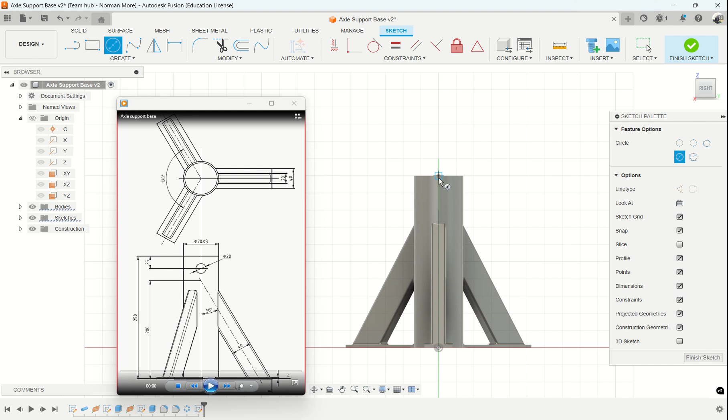So go to sketch, draw a hole in the center, 20 mils, and then dimension it from the top, 25 mils.

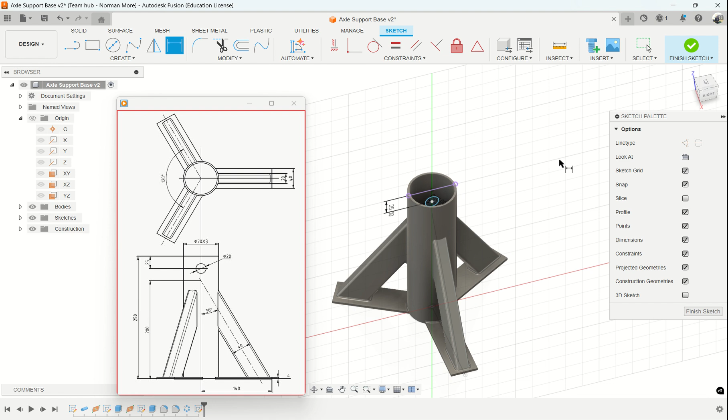And this hole is now, the sketch is in the middle. So I do my extrude. I pick the sketch, do an extrude cut, make it symmetrical so it passes both sides, and then do all and press OK. So that one is now finished.

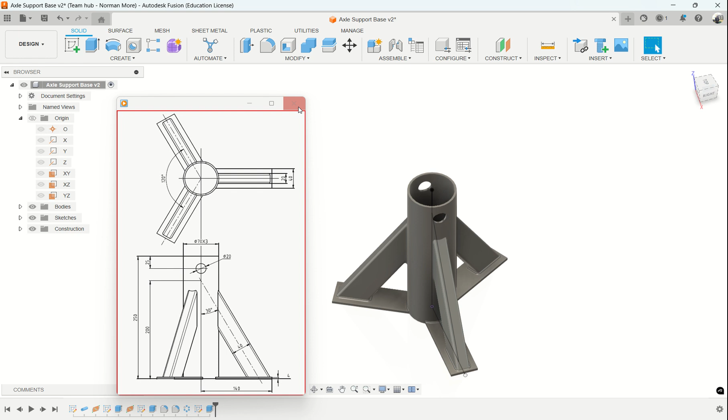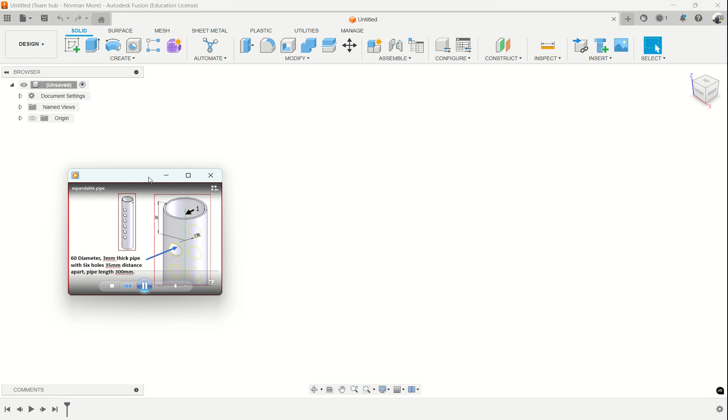So I can as well close that, and close that, and then we have a new one. So in this one we now go to the next piece, which will be inserted in that base support that was just made.

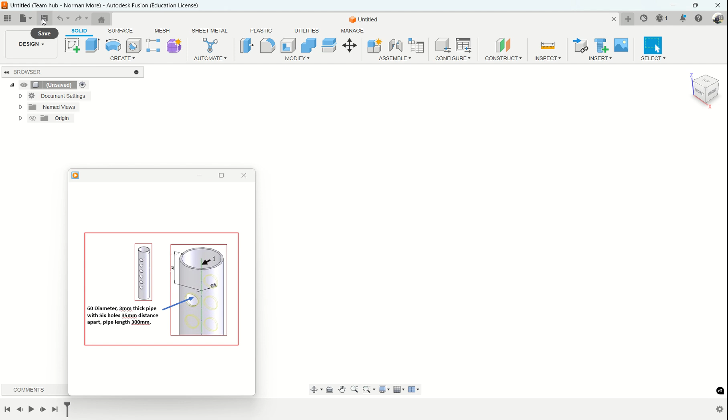So it is just a simple pipe with 6 holes, and this shouldn't take a lot, so we can save it again and call it expandable pipe.

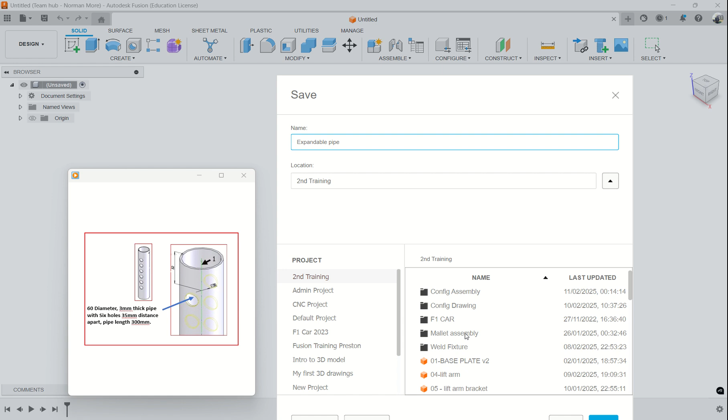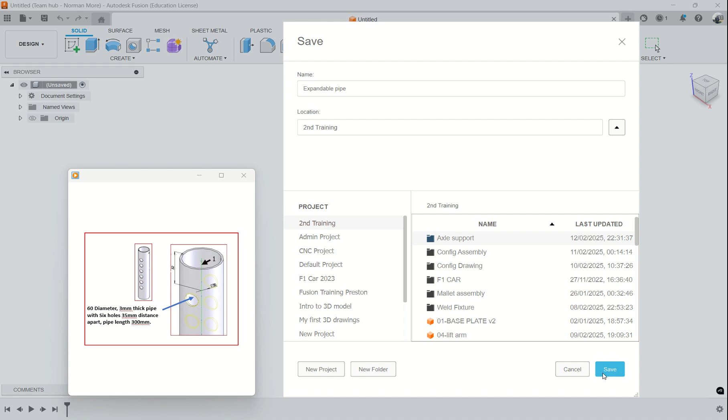I think I should have a folder which we're going to call Axle Support. I'll put that file which I did before, and I save this one.

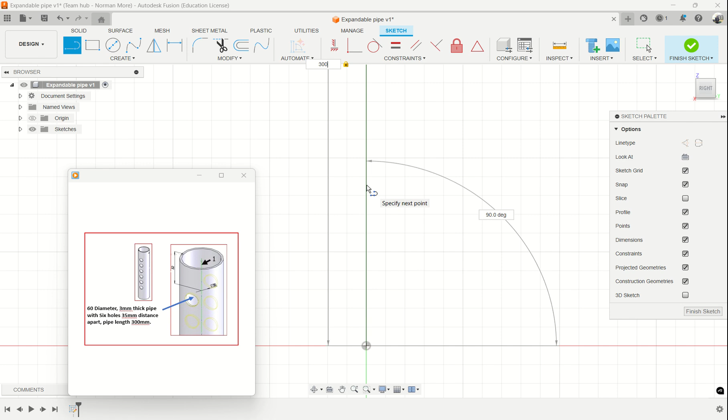Then we start drawing. This is a simple drawing. The pipe is 300 millimeters, so if I just drew a line 300 millimeters, and on this line...

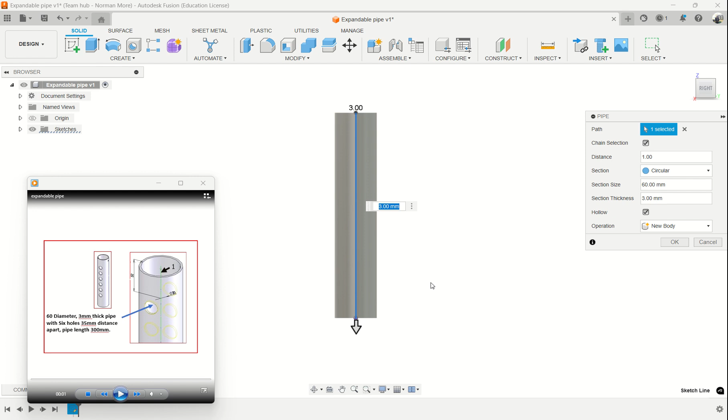I go to solid, create, pipe, and I touch that one. Make sure it is a 3 millimeter pipe and 60 millimeter size as stated there, and then I click OK.

This is our pipe now. So on this pipe we choose one of, let me put this one there, we choose one of the planes.

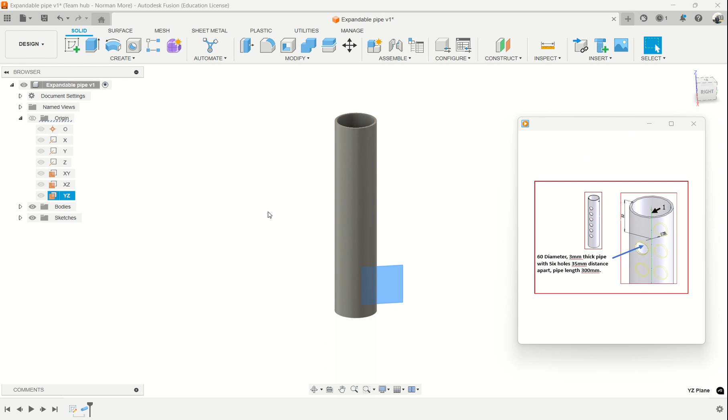That plane, I can draw a circle of 20 millimeters projecting from the center, circle 20 millimeters with the distance of 52 from the top.

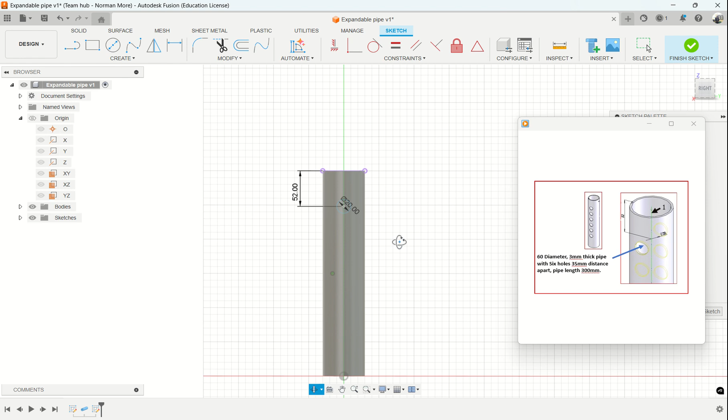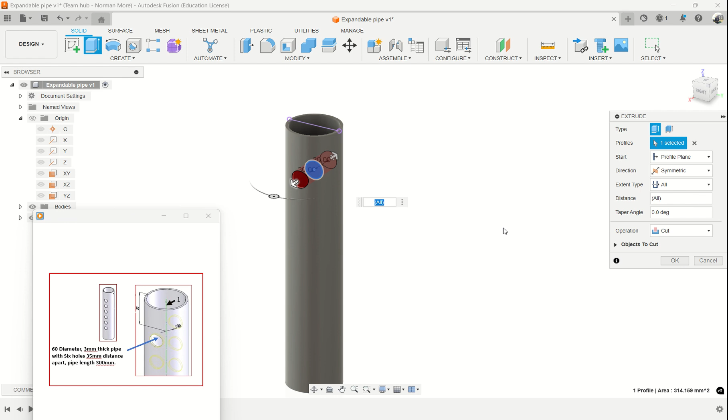Then, similar like we did for the axle support, we do an extrude and we do a cut, all symmetric, and then I click OK. That hole now is through.

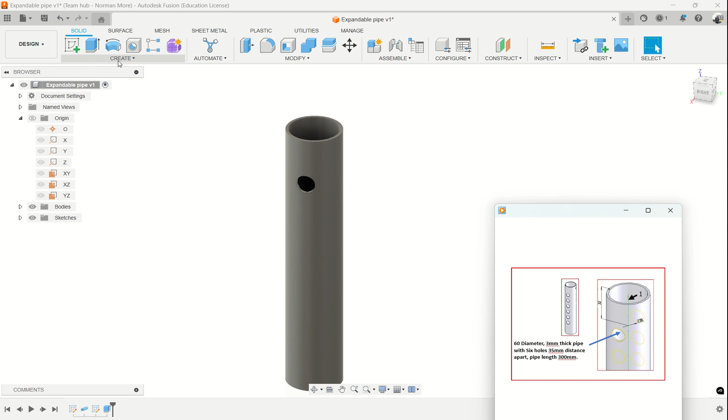So we need a series of holes for this one. So we can do this by doing a pattern. If I go to create, I do a linear pattern this time, which is called rectangular pattern. I select the object, which is actually that hole.

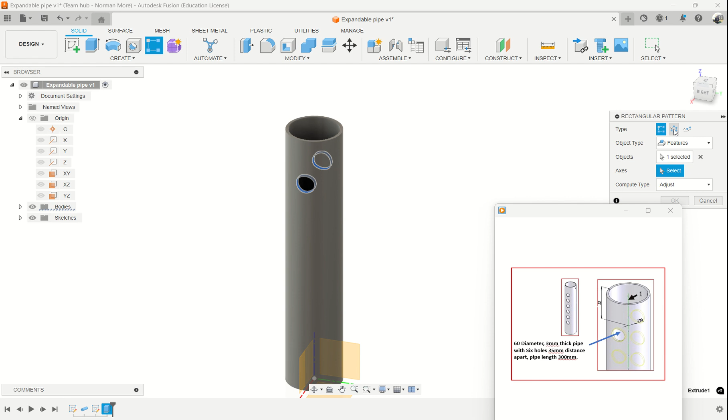Axis. I can select, should be the one going up, which is the Z. I can select it from there.

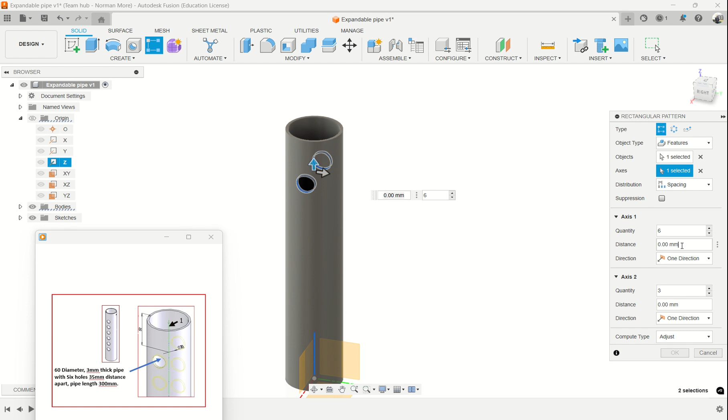Now we need to do a distance of 35. We need 6 holes, and since the arrow is showing up, so we need 35 in the negative. So we have 6 holes there, and then we click OK. So that will make a hole in between in all the directions.

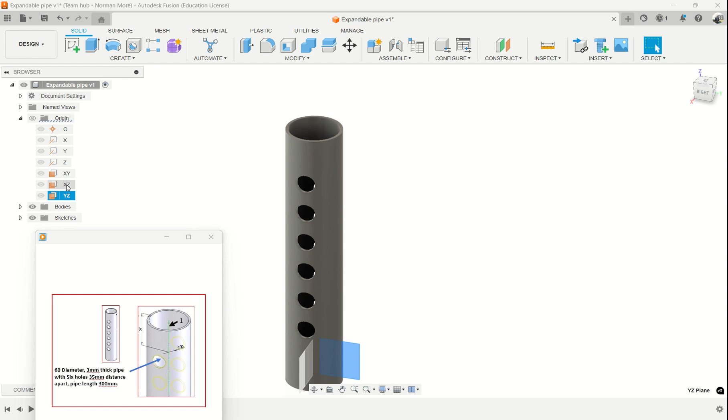There is another small hole on top, which is not shown here, but I will show where it is. Do again, on the side of the holes. There is a small hole which is only 5 mm, and that hole is 14 millimeters from the top.

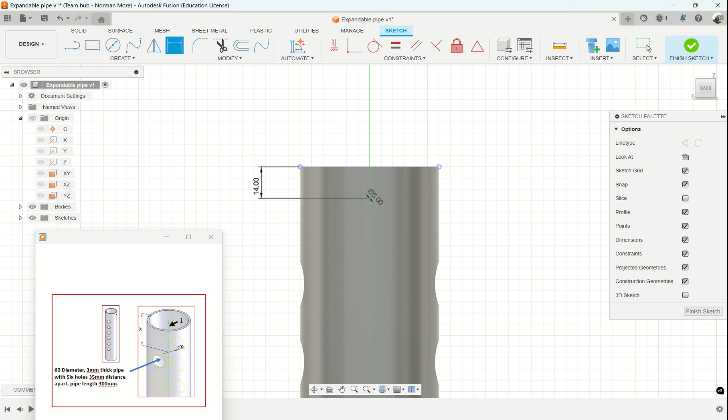And this one also can be cut and extruded through. So same way, extrude, symmetric, through all, and cut.

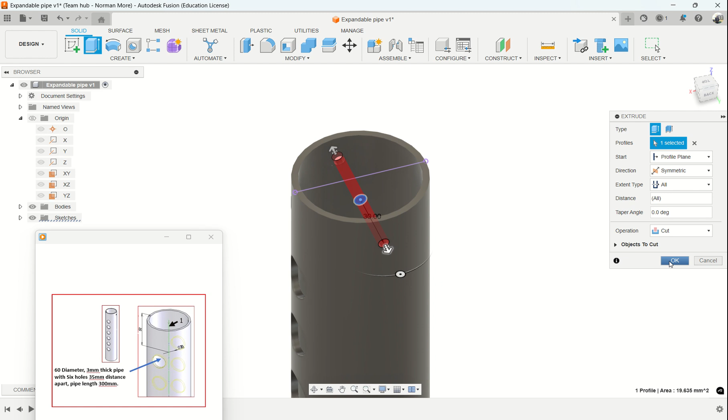And that finishes the design for the expandable pipe. Till the next drawing.